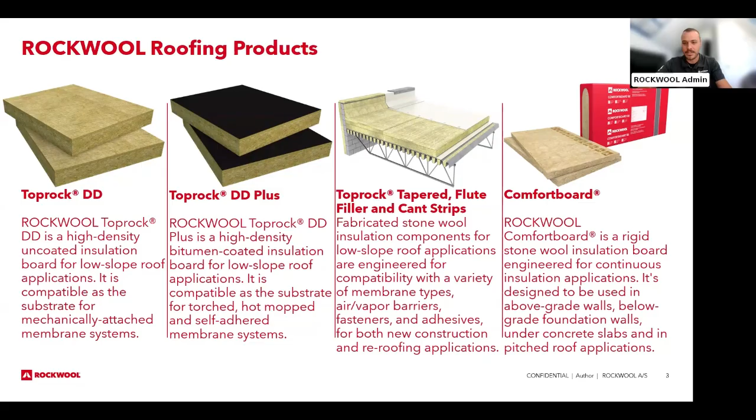I wasn't trying to get you in trouble, Chris. Thanks again for letting me know. No, it's a fair question, and you probably did get me in trouble, but we're okay. We're all right. We're gonna keep going. No, you didn't. It's fine. Really, you can go get these. I wouldn't show them if they weren't available. It's okay. That makes sense. Sorry, buddy. No, it's all good.

But I will say that the thing that separates a roof, specifically in my mind, from a different type of outdoor enclosure is that the roof, typically in my market, I look for overhangs. I'm looking to just shed water. It can be open on the sides. I have a roof over my covered front porch that's open on all sides. Well, I guess not the house side. You know what I mean? It's open air. The roof is as simple as an umbrella in my mind, whether it's part of the thermal and vapor control layers as well or not, is immaterial. It's definitely a water control layer, and it typically terminates open-ended, at least on a couple of sides.

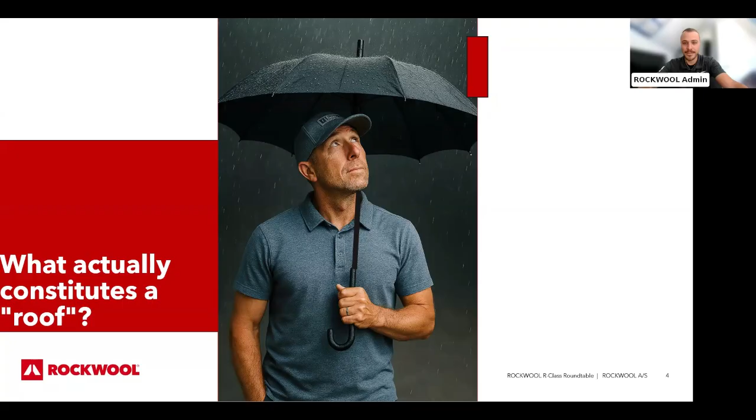It's as good an answer as any for now. I'll take that. Do you guys have anything that you want to add to that before we get into the meat and potatoes here? Nope. No? All right. Nick? All righty.

So as we start to think more about what is a roof, let's take a look at some of the needs of a roof. So one of the big needs is sun resistance. It's constantly being beat on by the sun. It gives us shade, protects what's inside of our home, kind of around our home. Oftentimes with overhangs, bulk water management, as Travis just mentioned, is a huge component of the roof itself. Outdoor temperatures are another one of those things. Everything from hot temperatures down to freezing cold temperatures. They kind of have to battle all those different areas.

When it comes to style options, there are so many different options that are out there. We were all joking here before everything started. The butterfly roof is certainly something we see up here in New England, right, Randy? But no, depending upon where you are located, design of the roof could play a very large role in where we're going to place our building, what it's going to look like. To me, something that pops out is shed roofs, trying to take on some more solar gain, and certainly overhangs on some of these buildings. I'm a huge believer in those as well, Travis. I think overhangs are tremendously important.

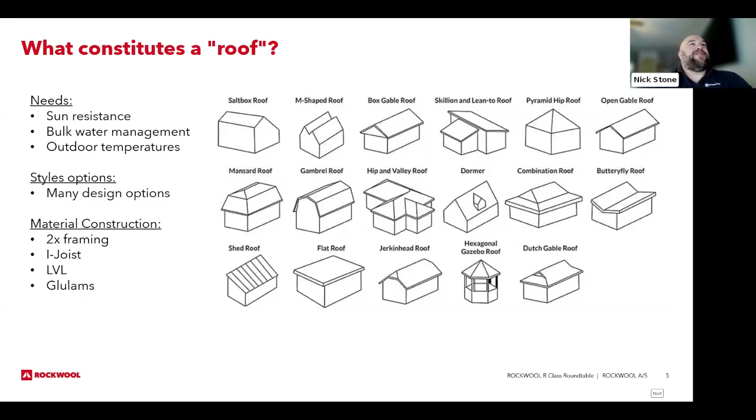But you're also looking at different loads like wind uplift, gravity, impact. So when we start looking and thinking about roof assemblies, there are just so many variables that we really have to plan for. Air control, vapors, a couple other ones. Now, when we're thinking on your projects, maybe I'll start with Travis. What are some of the loads that you're, in your area, considering, thinking about, and really planning for?

Well, we certainly have uplift concerns in our market. We're not coastal, obviously. We're in Kansas City. We're right in the middle of the map. But some would call it Tornado Alley. So uplift and wind loads are a real thing that our structural engineers are designing for. So that's certainly a concern.

And then we do get all four seasons. So snow load, or the gravity load, as you've got it listed there, we experience that, and we get the joys of hailstorms. So impact load. I guess I'm 3 for 3. We love it here in Climate Zone 4. I want to make sure to make Nick Stone true and honest in all of his speeches.

Yeah, absolutely. Now, as we move further north, let's start with Maine. Randy, what are some of the things that you're designing for and thinking about? One of the big things we're always thinking about is that snow load obviously is pretty great up here. But our biggest thing personally that we focus on is shading. So using our roofs to shade our windows in the summertime. That way we can plan and optimize that solar heat gain during the winter. So we're paying close attention to that shading opportunity.

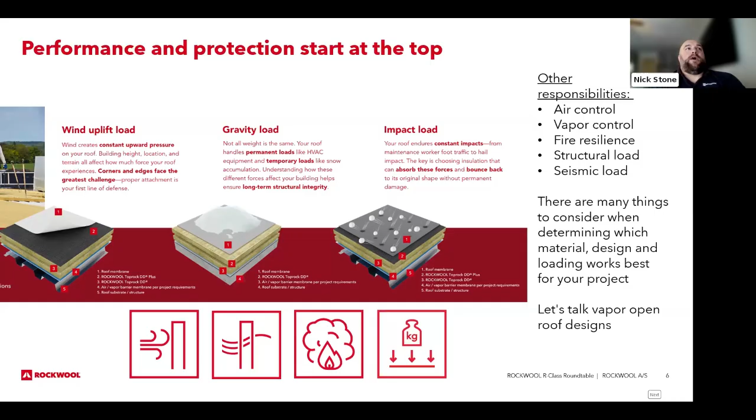Absolutely. Why don't we take a look at one of your projects and let's actually talk about what you did? Because when I started looking at this project, I don't think I saw a single penetration going through that darn roof. You did a good job. Yeah, we're lazy. We don't want to do any extra work up there. We just want to go ahead and get everything simple.

The idea was to get the plumbing vents through the sidewall. We had a very minimal overhang on the east side of a tall face. I think it was only 18 inches for a section, so it was very easy to just extend our sidewall plumbing vents out to accommodate that. This house has three Mitsubishi low wall heat pumps. Excuse me, ductless mini splits.

They are heat pumps, but anyway, the point is that we don't have any flue gases to exhaust. We don't have any combustion appliances in this home. So we were really just trying to solve for plumbing, and I believe we were able to do it without any holes in the roof, if I remember correctly. I was looking through the videos earlier today, and I think you had zero penetrations.

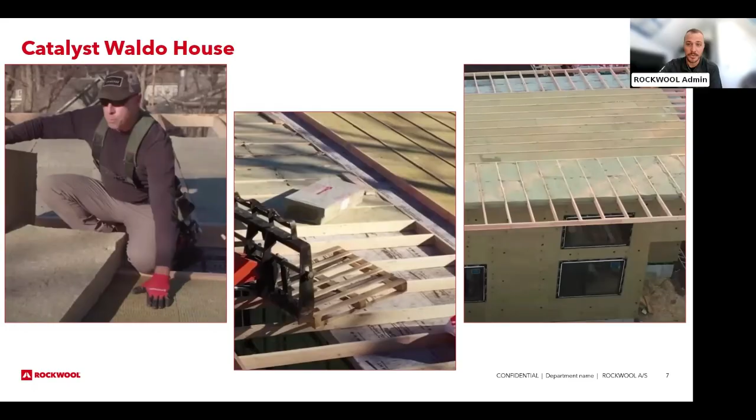I like it. I wanted to transition from this explanation to another application that's very different. It was done very differently. And Randy, I'd like to give you the floor here because again, you're dealing with similar weather systems. You're dealing with similar issues up there, but you did a very different system. Yeah, we approached this. This was a retrofit, but we did much like Travis did.

Randy, real quick, when you say you chopped that roof off, can you kind of walk us through? Because in my head, I'm like, whoa, you ripped that whole entire roof off? I don't think that's quite what you did. No, that's not. Yeah, good catch. No, we chopped off the overhang. They were trusses that were made on this existing house, and the tails of those trusses we chopped off to create what I like to call the monopoly house, or the industry's calling it the monopoly house look. So that perfect rectangular house with no overhangs is the easiest way to achieve that air barrier.

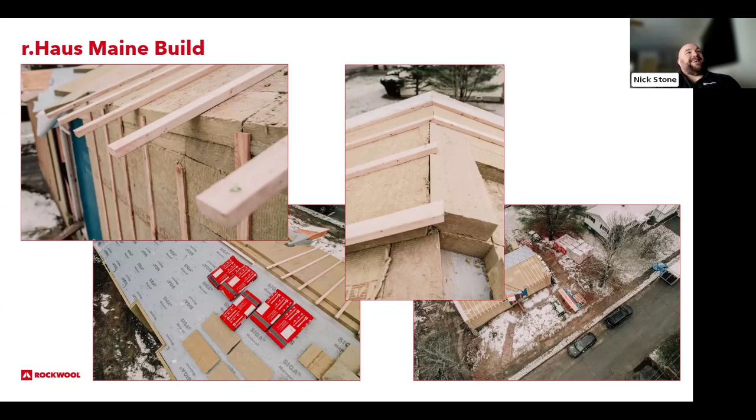Keep it, carry on. But Randy Williams, if you wouldn't mind walking us through, what is a hot roof? What is a cold roof? These are terms that get thrown around quite often. As we were putting this together and looking for information, even online, there was some miscommunication on what the differences were. So I think this is a great opportunity to talk about it. So hot roofs are typically unvented. They're completely filled with insulation. Cold roof is ventilated. It's just that simple.

There's a spot in there to reduce the temperature, to flush the roof if it does get hot, which we see in the summertime quite a bit. Depending on the time of the year, a lot of times that roof is almost ambient. Of course, if the sun's shining in summertime, that roof is going to be hotter, that attic will be hotter. Wintertime, it could be a little bit cooler in the attic, depending on the time of the day or the time of the year. But that's basically all it is. It's just ventilation. The cool thing about ventilation is it works. It works in all the climate zones.

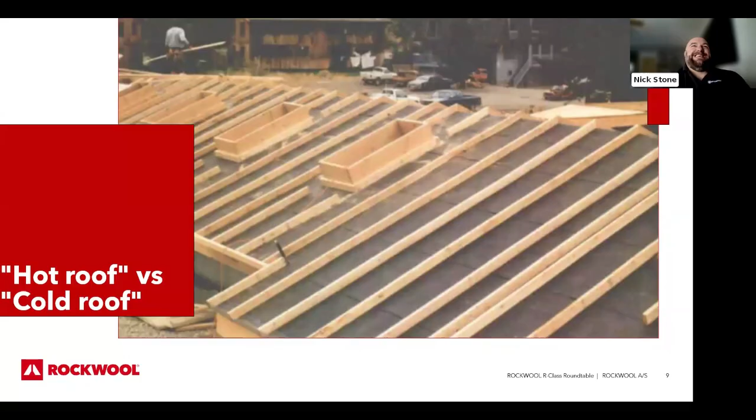When I think of this, well, you know what? Randy, when you see this, what are some of the things that come to mind when you see the ventilation part of it? Does this kind of make you nervous? Does this say I've done this, I like this? Walk me through some of this. Yeah, this is a pretty traditional application because a lot of the stuff that we have going up here is utilizing trusses. And so when somebody is doing a truss roof, it tends to be that flat ceiling.

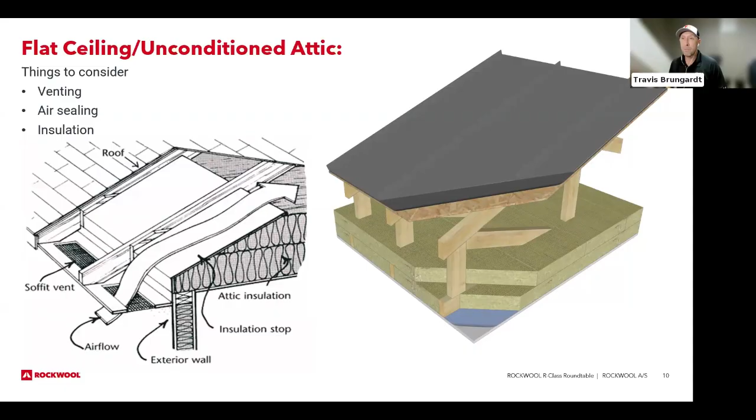We do conditioned crawl space, we do conditioned basement, and we do conditioned attic. What you have here is an unconditioned attic because there is no air seal, there is no thermal boundary at the back side of the roof deck below the ceiling. In our spaces, we love to have a conditioned attic instead because it gives us a lot of freedom.

And that's what you were trying to get me to lead into. So I think that's a high five. We planned that really well. You're crushing it today.

Yeah, and then as we start to transition into the cathedral ceilings and what that looks like, before we jump into this, one thing I want to mention that Randy alluded to a while ago is where you are in the country from a zone standpoint. This is really going to affect this one pretty dramatically.

Once you start adding that insulation right up against the roof decks, because you could do unventilated assemblies, or an over roof system with ventilation, similar to what Travis did on his design, we have to start to pay attention to where these control layers are going based upon the zone. So keep that in mind, everyone listening. There are some quirks to some of this stuff, so we're going to speak generically here.

But Travis, when we start thinking about cathedral ceilings, where is that insulation located, and why are we doing that versus having the insulation downward? What are some of those benefits? Well, there are many. My favorite benefit is that everything that we keep in our house, we wanted for a reason, right? We bought it, we made a person, we brought them into our home, we have a pet.

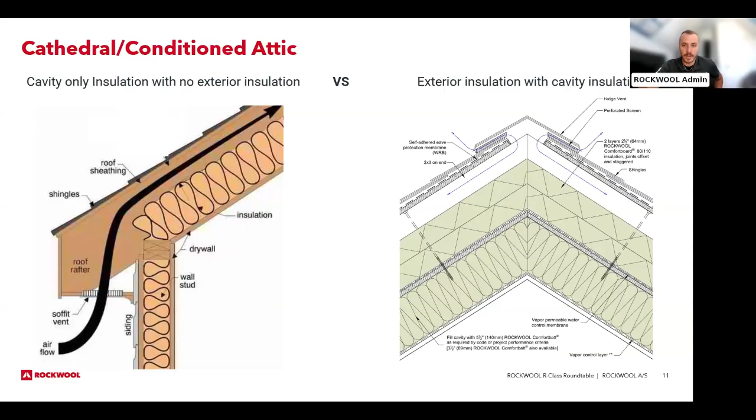If you guys are willing to stay a couple more minutes, we do have a slide on flat roofs specifically. Everything thus far has been pitched, whether it was your standard 2/12, 4/12, or a low slope, but we do have a flat roof that Nick wanted to talk about. Yeah, so flat roofs are not always something that we, at least on the residential side, talk a lot about. Certainly more prevalent on the commercial side of things.